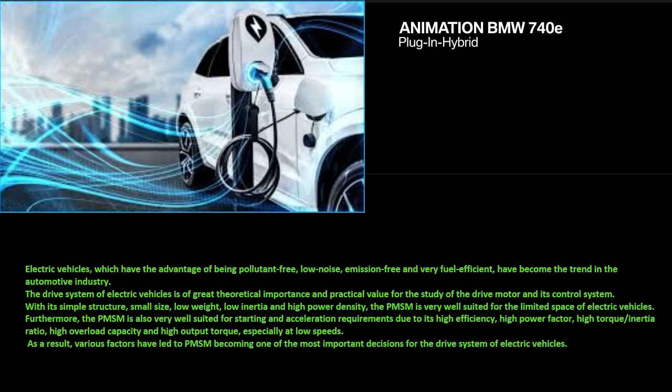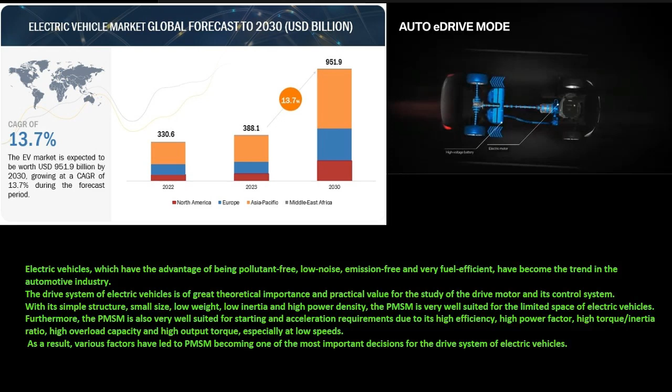Electric vehicles, which have the advantage of being pollution-free, low in noise emissions, and very fuel efficient, have become the trend in the automotive industry. The drive system of electric vehicles is of great theoretical importance and practical value for the study of the drive motor and its control system.

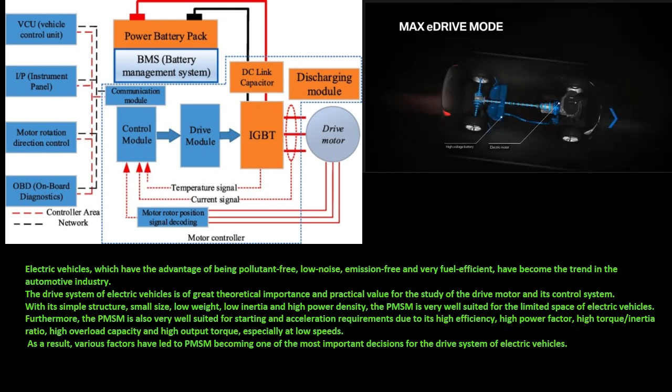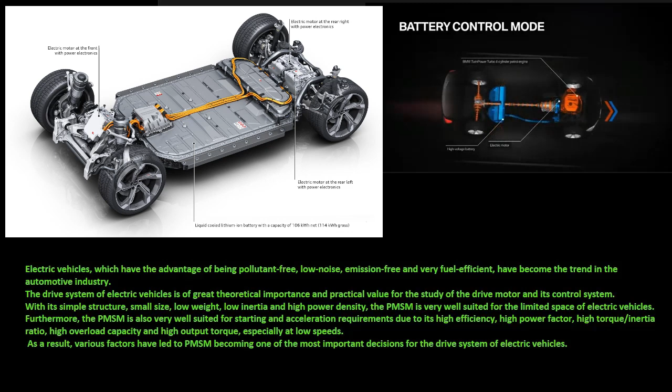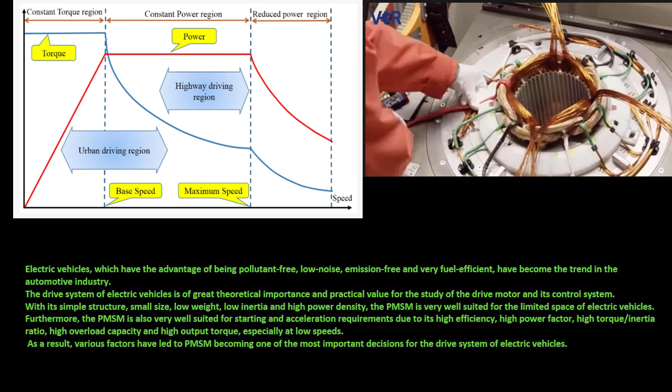With its simple structure, small size, low weight, low inertia, and high power density, the PMSM is very well suited for the limited space of electric vehicles. Furthermore, the PMSM is also very well suited for starting and acceleration requirements due to its high efficiency, high power factor, high torque to inertia ratio, high overload capacity, and high output torque, especially at low speeds.

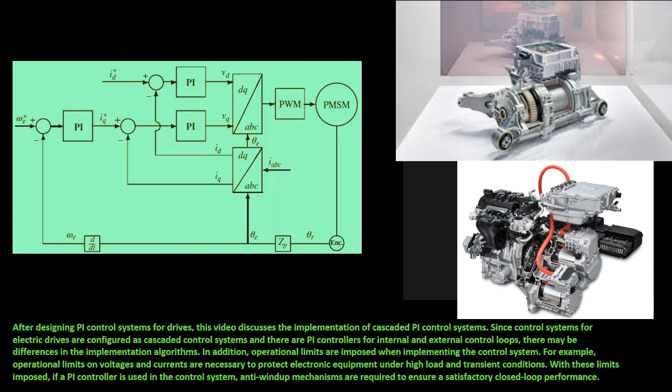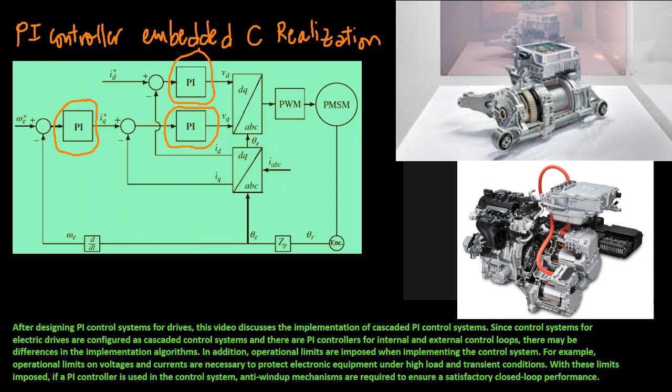As a result, various factors have led to PMSM becoming one of the most important decisions for the drive system of electric vehicles. After designing PI control systems for drives, this video discusses the implementation of cascaded PI control systems. Since control systems for electric drives are configured as cascaded control systems, with PI controllers for internal and external control loops, there may be differences in the implementation algorithms.

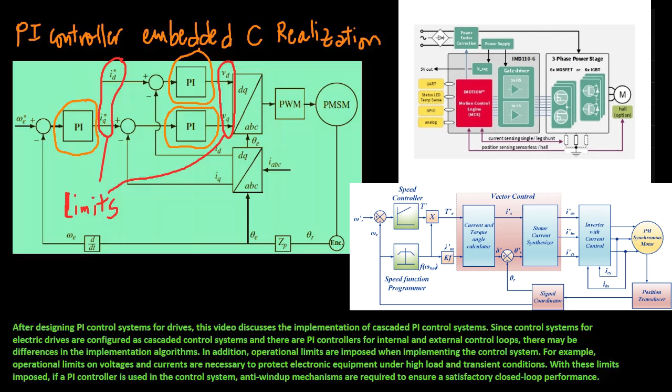In addition, operational limits are imposed when implementing the control system. For example, operational limits on voltages and currents are necessary to protect electronic equipment under high load and transient conditions. With these limits imposed, if a PI controller is used in the control system, anti-windup mechanisms are required to ensure a satisfactory closed-loop performance. The current control signals are D-axis and Q-axis voltages, VD and VQ.

Due to the operation of the inverter, the DQ-axis voltages for electric drives are limited by the PWM and DC voltage. Assume that the DC link voltage is VDC. Then, the amplitude of the space vector voltage signal is limited when using PWM with harmonic injection or space vector PWM.

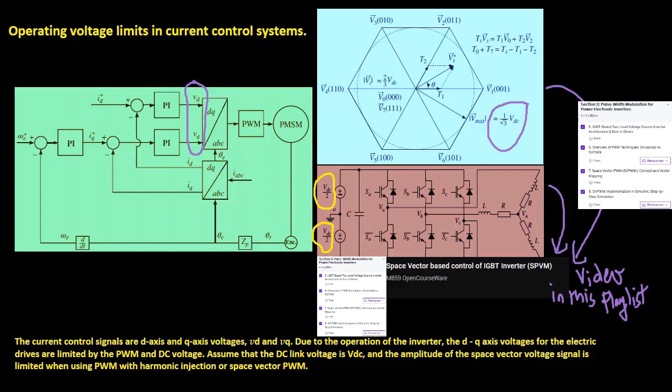As we saw in this video, this limit leads to limitations in the amplitudes of the D and Q axis voltages. So we should determine the maximum and minimum values of VD and VQ in real time by scaling the values of actual VD and VQ proportionally.

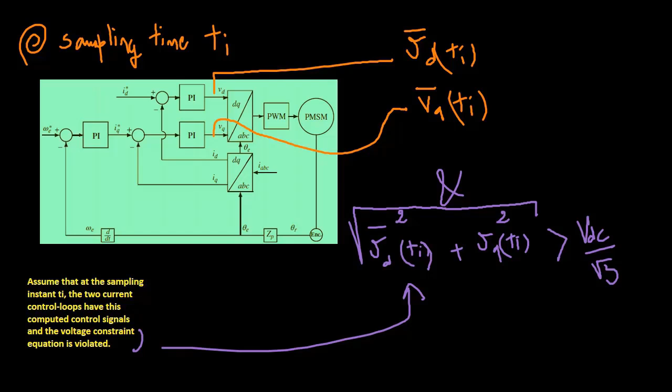Assume that at the sampling instant Ti, the two current control loops have these computed control signals, and that the voltage constraint equation is violated. If the voltage constraint violation occurs, then the solution is to find VD new and VQ new of this equation. So we should maintain the same ratio while satisfying this constraint.

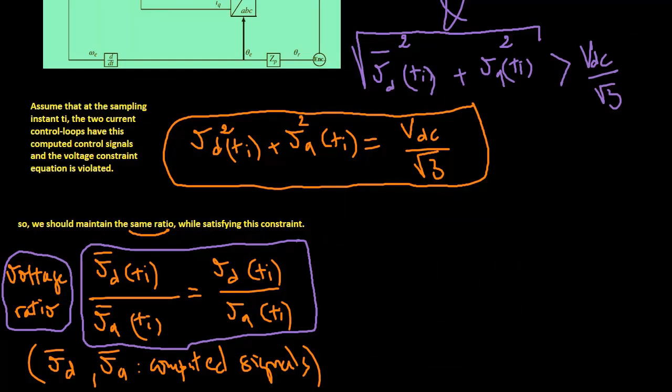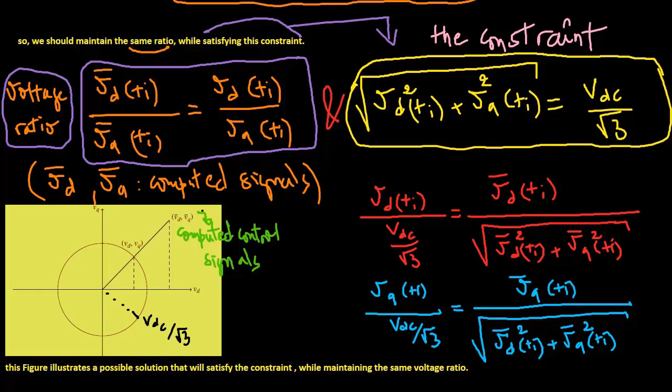This figure illustrates a possible solution that will satisfy the constraint while maintaining the same voltage ratio. The limits of the D-axis and Q-axis voltages are varying with respect to time depending on the computed control signals.

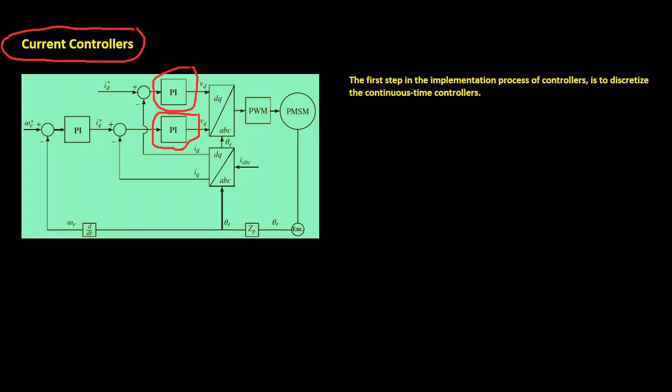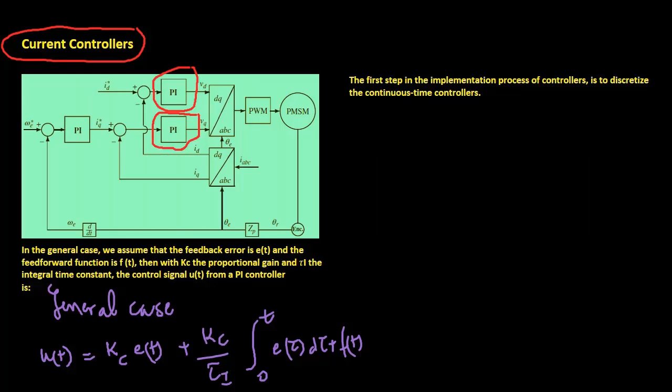The first step in the implementation process of controllers is to discretize the continuous time controllers. In the general case, we assume that the feedback error is E and the feed-forward function is F. Then, with Kc, the proportional gain, and tau, the integral time constant, the control signal U from a PI controller is defined as...

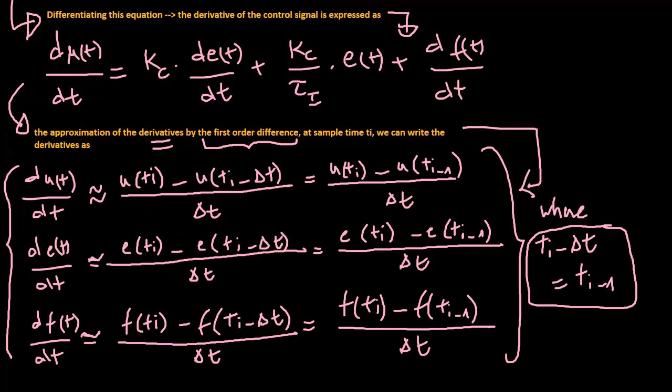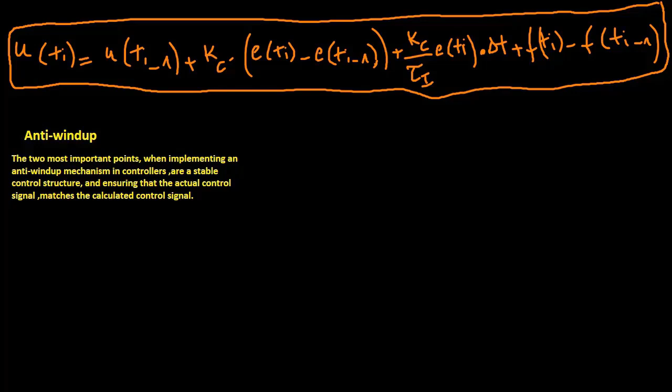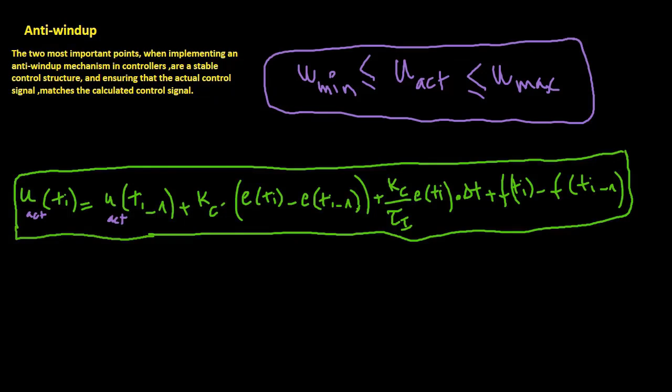The two most important points when implementing an anti-windup mechanism in controllers are: 1. A stable control structure. 2. Ensuring that the actual control signal matches the calculated control signal. The actual control signal must satisfy this constraint in order to stop the integration when the actual control signal reaches the limit. We impose the limits on the actual control signal.

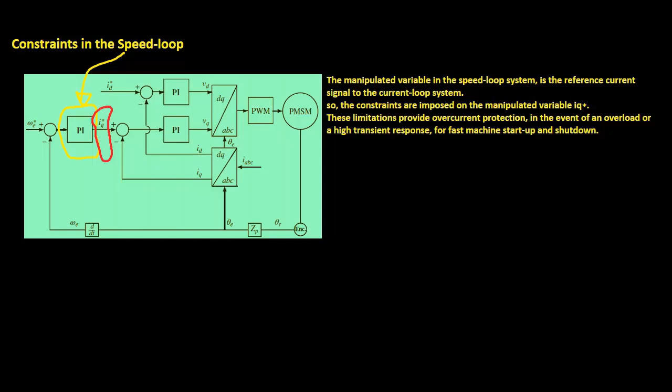The manipulated variable in the speed loop system is the reference current signal to the current loop system, so the constraints are imposed on the manipulated variable IQ star. These limitations provide overcurrent protection in the event of an overload or a high transient response for fast machine startup and shutdown. The constraints are simply imposed as where IQ max is the maximum current allowed.

When implementing the PMSM current control, we have two options for configuring the control system. The first is to use a proportional controller for the q-axis current control system. The second is to use a PI controller for the same loop.

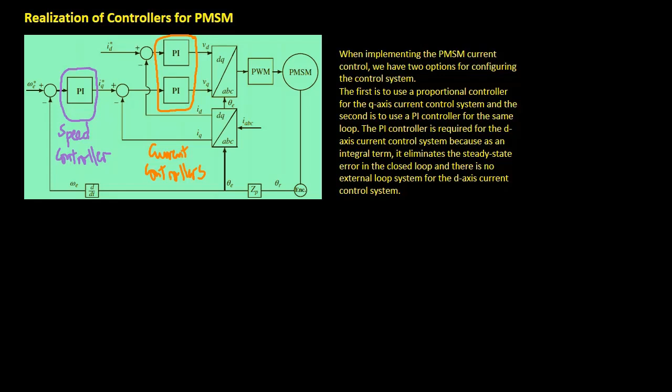The PI controller is required for the D-axis current control system because it has an integral term. It eliminates the steady-state error in the closed loop, and there is no external loop system for the D-axis current control system. We have already covered and developed all of this in detail during the last videos.

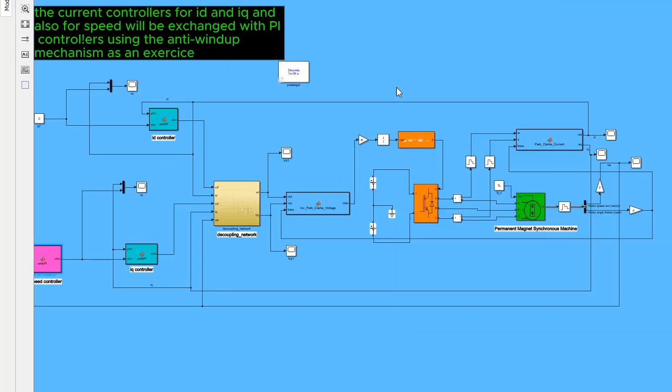What we still add today is to integrate this embedded controller into the simulation for the speed control of the synchronous machine. In the simulation today, we will only look at the controller blocks. Everything else we have already looked at several times. To implement the real-time PI control algorithm, we produce an embedded MATLAB function that can be used in a Simulink simulation.